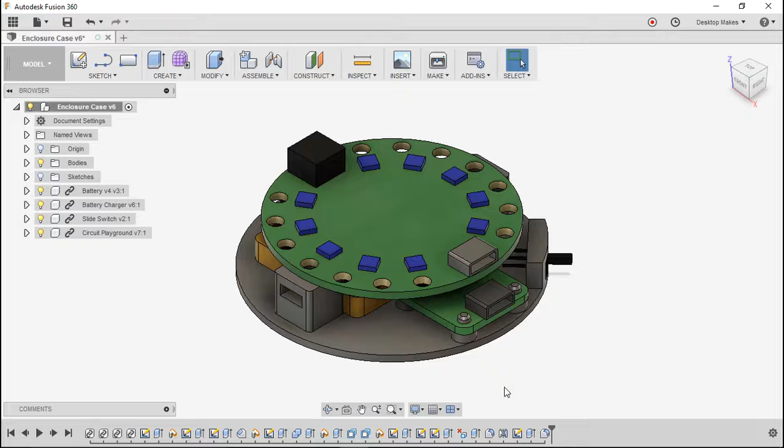Next, we'll modify the positioning of our battery. So to get a good look at it, let's remove that Circuit Playground board and we'll go to a top view. The issue we're having here is that the battery is just too close to the battery charger, so that when we plug in our battery connector, it will actually interfere with this battery.

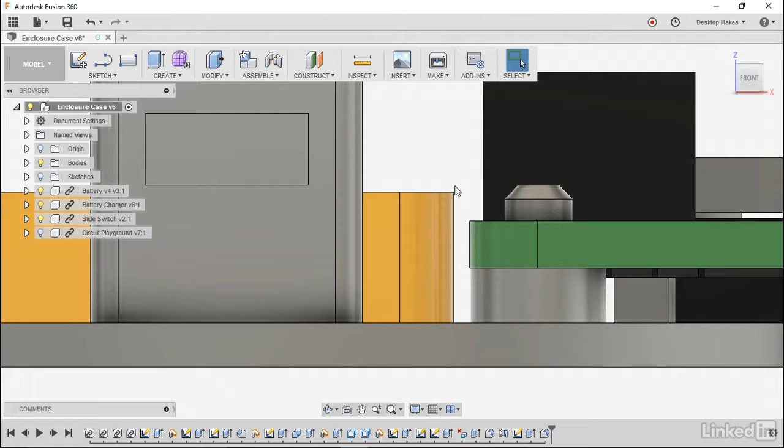To get a better look at that, let's take a look at the side view. Notice the height of the battery compared to our port for the connector. So you can clearly see there how that would be an issue. Okay, to solve this, we're going to just move the battery a little bit to the left. And to do that, we're going to need to modify this extruded block here.

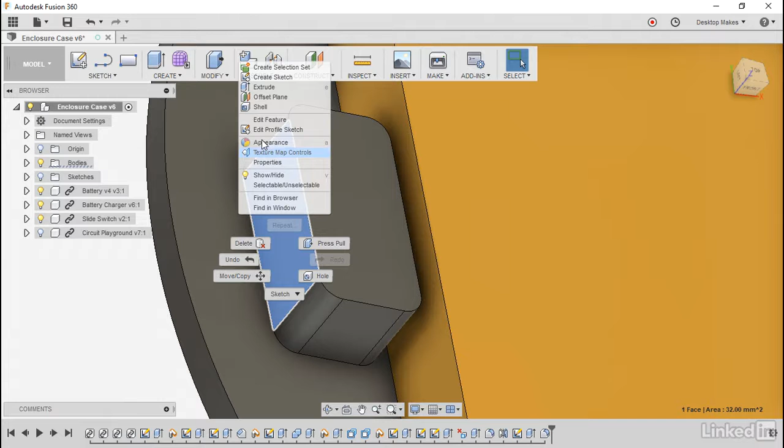So let's jump into that sketch by right-clicking on the side of this block and going to Edit Profile Sketch. That's going to bring us to that sketch, and we're going to remove all the components we don't need here. And let's expand sketches, and we'll just toggle all the sketches that are useful to us. So I'm going to go through each one of these and just keep the ones that I will need.

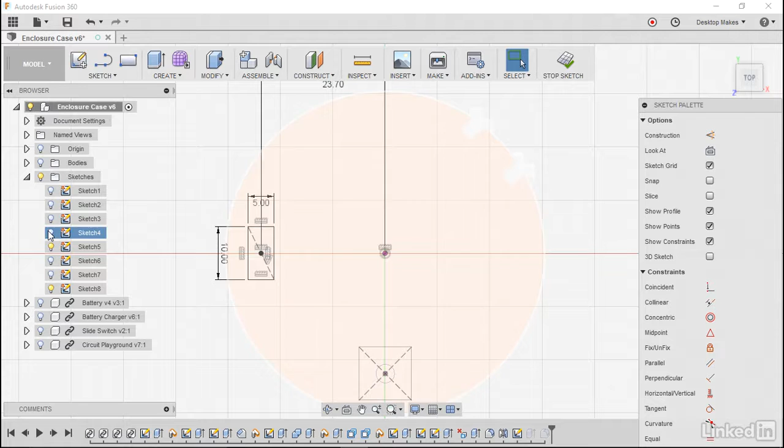So I'm going to need to see that. I don't need to see that. Sketch 3, no. Sketch 2, yes, that'll be useful. And we'll do sketch 1. Okay, now that I have all my reference sketches in view, the first thing I'll do is delete this constraint here. So this is what's locking this rectangular shape in place right here. So we'll take that and delete it, and that makes it free to be moved around.

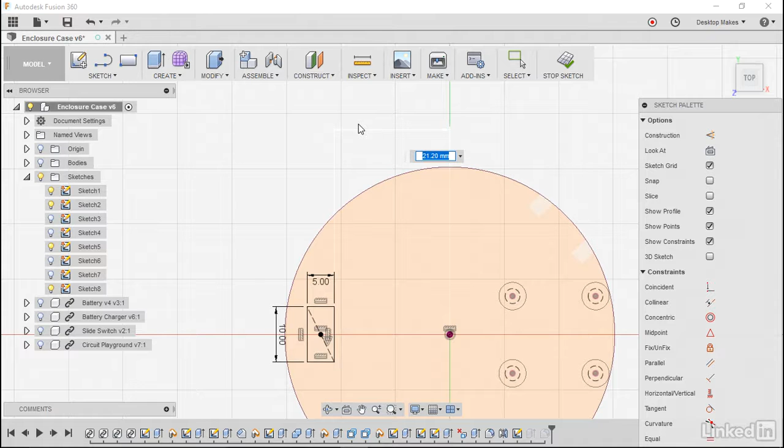And let's dimension it instead from this edge. That would be more useful than the actual center point. So we'll click on that edge and click on the center point and see what that's given us. That says it's 21.2. Let's push it out about a millimeter or so. So I'm actually going to do 22.5 millimeters, and that's going to bring it over.

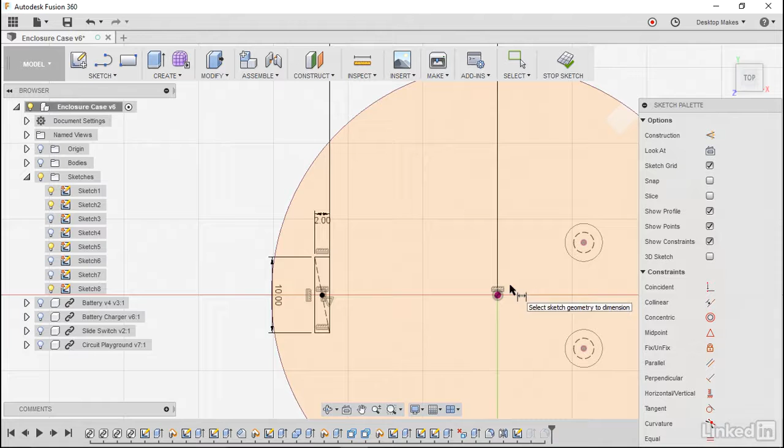The next thing is this thickness is actually a little more thick than we need. So we'll double click on that 5 and change that to 2 millimeters. I think we can get away with a 2 millimeter width extrusion. So we'll hit enter. Okay, now we can create some constraints on this side. So before, remember that it was the battery charger that was constraining the battery on this side. Since we're moving it over a little bit, we'll have to make some new constraints there.

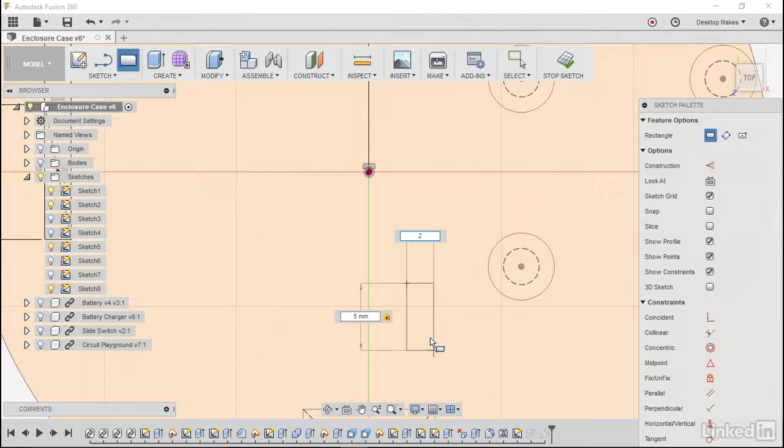So what we'll do is we'll just draw a rectangle here. So R for rectangle. I'm just going to position it here for now. I'm going to make it 5 millimeters in height by 2 in width. Hit enter. We'll zoom out. And if you recall, our battery width was 29 millimeters. So I'm going to hit D for dimension and just dimension this rectangle from this rectangle and make that just a little bit bigger at 29.5.

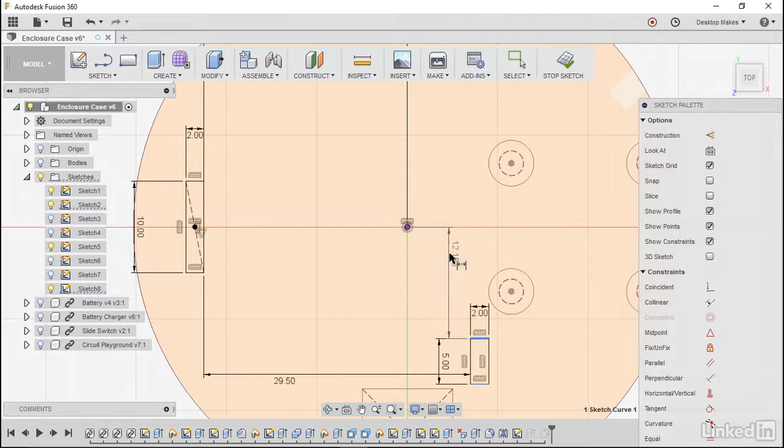Hit enter. And now I'm going to hit escape, and I can position this. I can double click it and just bring it down a bit. And we'll hit escape again to deselect. D for dimension, and I'll just dimension this top side from our origin, and we'll make that 12 millimeters. That looks good. Okay, now we can mirror this rectangle on this side.

So to do that, I'll hit escape, click L for a mirror line. I'm just going to draw on the side here. Click the check mark. I'm going to hit escape, take this line, hit X to make it a construction line, then grab my horizontal constraint, click on this edge and constrain it to our center point.

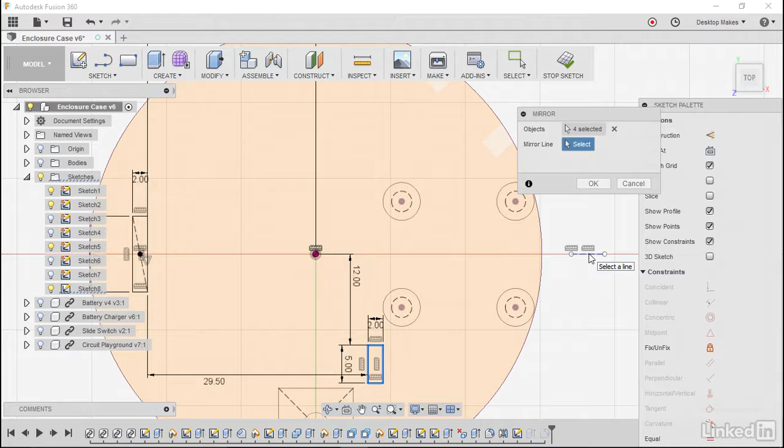And now I can use that to mirror this rectangle. So I'll hit escape, go to sketch, down to mirror. I get this dialog box. My objects is going to be this rectangle, so I'm going to double click to select all 4 sides. My mirror line is going to be the mirror line we created, and then I'll click OK.

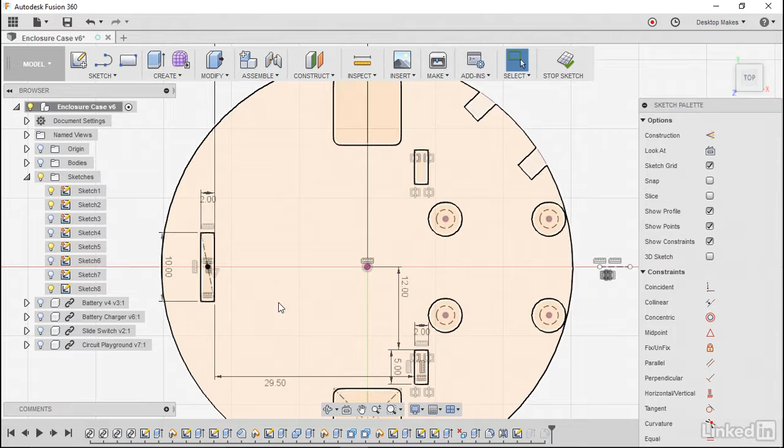Alright, so we narrowed this extrusion here and we pushed it back a little bit, and we set this at 29.5 millimeters, which is less than we had before. Before we had a little over 30, I believe, as the distance between the battery charger and our constraint on this side. So that should be enough to give us enough room here between our battery and our battery charger.

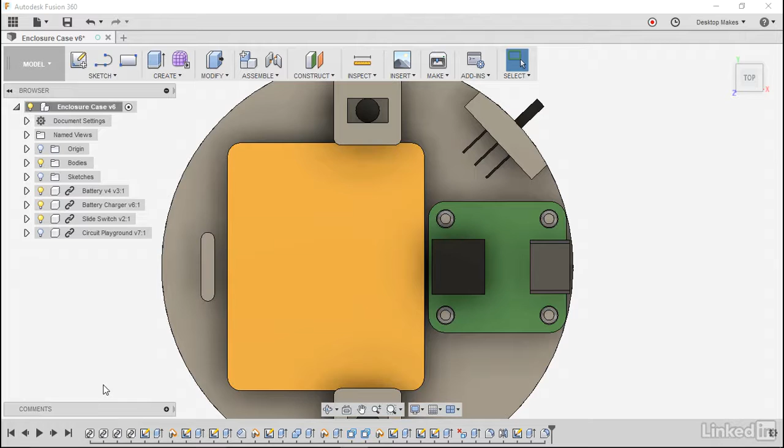So we'll click on Stop Sketch. We'll need to bring back our body. We can reduce the sketches folder here, collapse it, and let's bring back our components. So I'll just bring back everything here except the Circuit Playground. And so we see where our battery is. So now we know we have room to move it over, since this is our new constraint here on the left side. We are going to need to extrude the other constraint blocks.

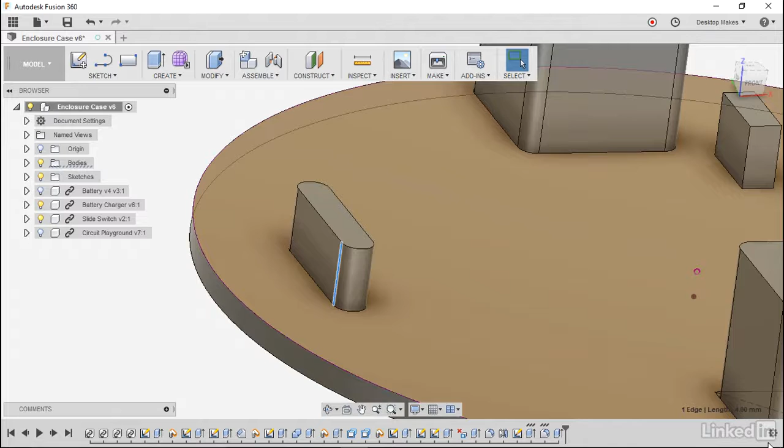So let's bring back that sketch, remove battery, and we'll hit E for extrude, and I'm going to select these 2 profiles, and we'll bring these up 4 millimeters to match the other one, which I believe was the distance. We can check by just clicking on this edge. And yes, that's 4 millimeters.

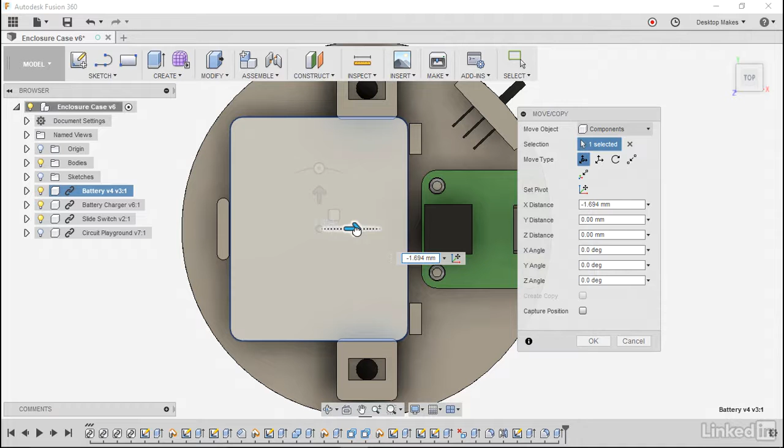So now let's take a look at that battery. We'll bring it into view. And let's go to a top view, remove sketches. And let's move that battery by right-clicking on the battery component under our browser and going to move. And now we can move that over, just manually drag it over. And we just want to see that it's between these two sets of blocks. And we have enough wiggle room, it looks, in there. So I'm going to click OK.

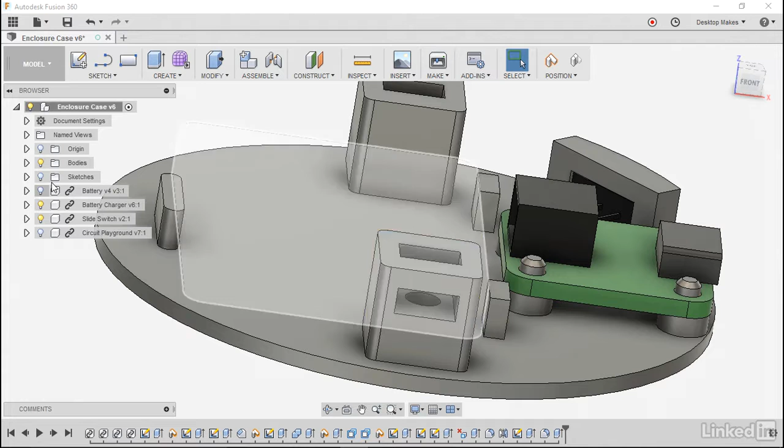And that should be just enough room there to get that plug in there and give us some room in there for that connector to be unobstructed. Again, we can confirm our dimensions by removing the battery, going to inspect, and we'll inspect the distance between this block and this block, and that should be 29.5. So we're good there. Next, we'll apply some fillets to these extruded blocks.

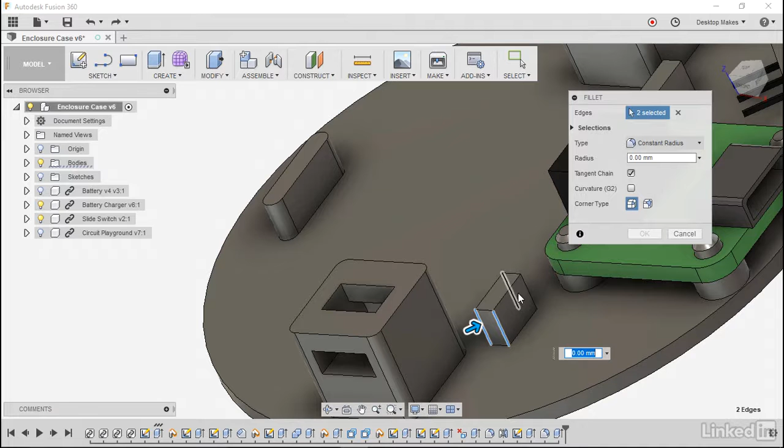First, we'll fillet it so that it matches the rounded shape of this one. So we'll do F for fillet and select each one of these vertical edges. We'll do the same thing with the mirrored one here on this side. And remember, if you accidentally select an edge, you can just select it again to deselect it. We're going to enter 1 for our radius and click OK.

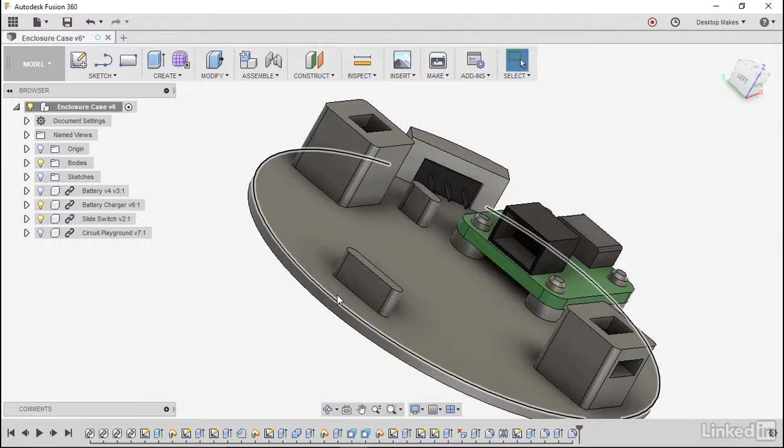And then we're going to do that again, but this time to the base, because this is only 2 millimeters wide. And so we're going to give it a little fillet to give it a little more strength so they don't snap off as easily. So again, F for fillet, and this time we'll just select once to select each of these bases. So we'll select all 3 of them, 1 millimeter fillet, and we'll click OK.

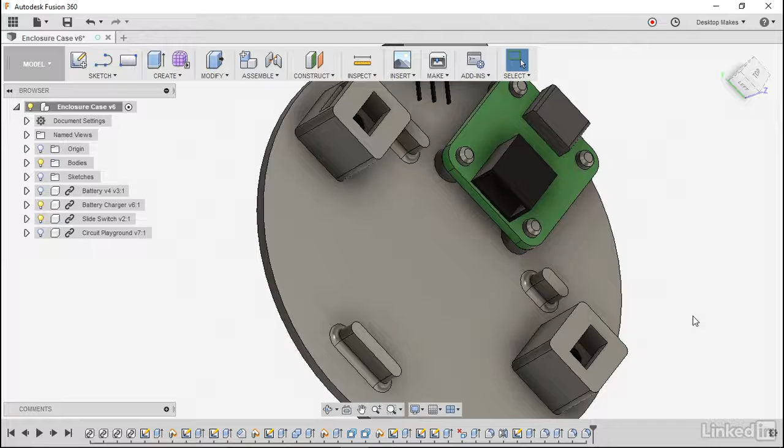And that looks good. Let's go to a top view and bring that battery back in view. The left and right barriers look good. However, there is a problem with the ones to the bottom and the top, which are our platforms for our Circuit Playground. And you can see there. So let's address that in the next video.